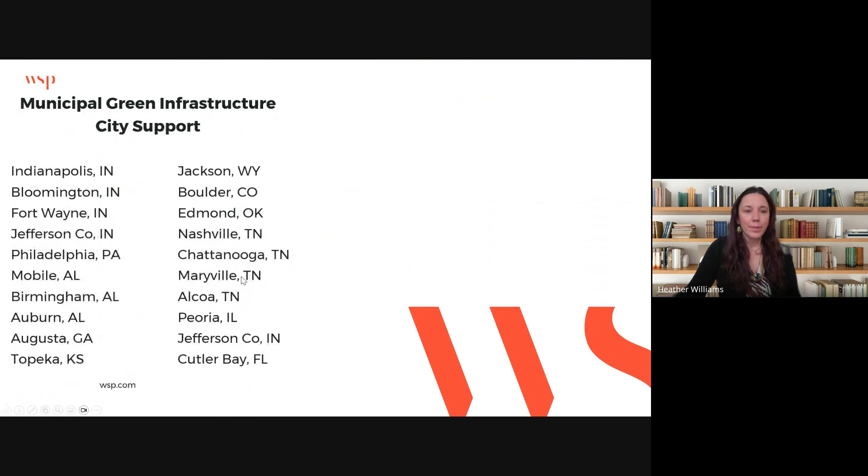So, with that 18 years of experience at WSP, I have had the opportunity to work across the country and also in Canada. I don't think I put my Canadian clients on this slide, but this presentation is really developed from that wealth of client experience across the country. So I have worked in Indiana with several clients, and then also across the country. So you can see I've worked in Colorado, Wyoming, Tennessee,

Pennsylvania. But the reason I'm putting this slide up here is that there is no one size fits all to stormwater management. There is no one size fits all to green infrastructure and sustainability integration. Each of these clients, we've taken a similar approach to process, but getting to the end goal of successful implementation of green infrastructure is unique to each of these clients.

And in this presentation, I'm going to give real life examples. And most of these photographs are pictures that I've taken, projects that I've worked on. And so as I'm speaking, I'm going to give a lot of lessons learned and opportunities for collaboration throughout the presentation.

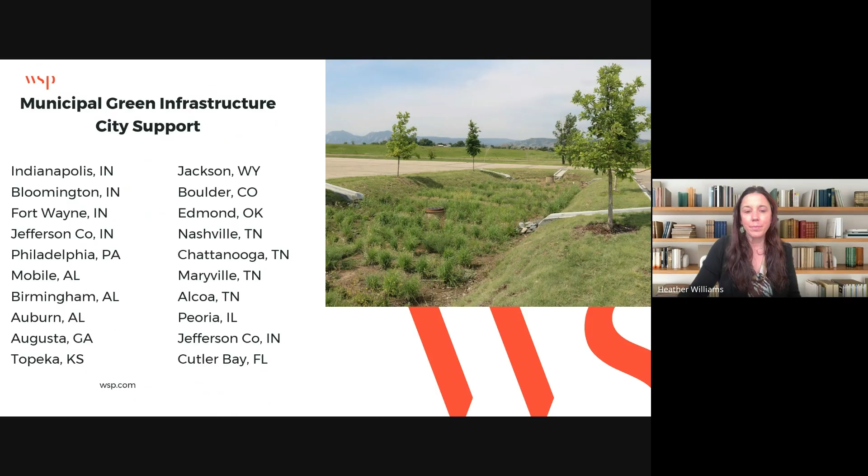So the presentation outline today, I know I have a broad group of participants, of multiple target audiences here. So I'm going to just go through why is stormwater a problem, and then talk about the regulatory history of stormwater. And, you know, being in the stormwater industry, like any industry, we have our acronyms. So I'm going to try to stay away from using tons of acronyms and talking too quickly, because I've caught myself doing that before.

So again, I'm going to start with why is stormwater a problem, and just tee it up very basically, and then go into what is green infrastructure and low impact development, and how does green infrastructure work in municipalities? What are we actually talking about? Are we talking about capital improvement projects? Are we talking about private development and redevelopment? Or are we talking about all of the above? So I'm going to really dive into how does green infrastructure work in municipalities?

You know, what are the different motivators? Some communities I've worked with, it's more of a mayoral initiative where the mayor is really into sustainability and green infrastructure, and there's not really much regulatory pressure. However, in other communities, there's tons of regulatory pressure, maybe coming down through the state saying you shall use green infrastructure. So I'm really going to dive into some of those different motivators for using green infrastructure, because that helps a municipality develop the program.

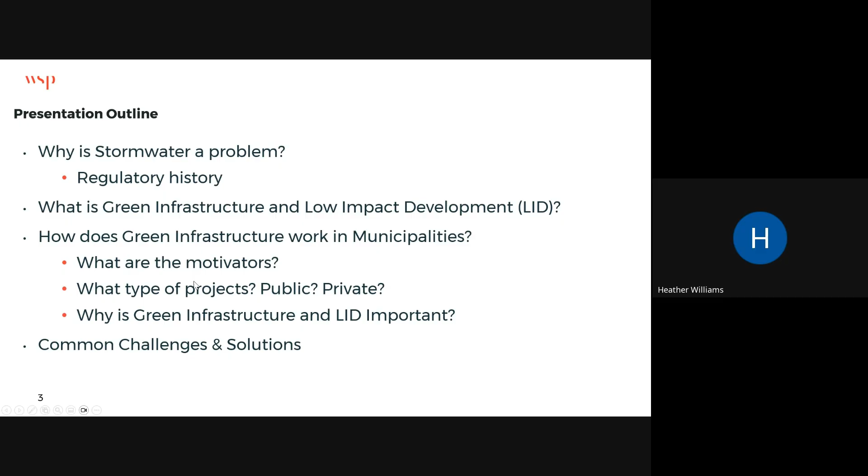So let's get into the why. Why is stormwater a problem? And we're going to start with thinking about water quantity, so the amount of water coming off of the land. If you look at the top image to the left, this is natural ground cover. If we think about natural ground cover, wooded areas, grassy areas, when it rains we're not going to have as much runoff coming off of this natural ground cover.

So you can see there's about 10% runoff coming off of the land as compared to the image on the right, which is 75 to 100% impervious cover. So if you think about developed, downtown areas where there's a lot of impervious surface, 75 to 100% impervious surface, we're going to see about 55% of runoff coming off of that land type.

So the amount of runoff coming off of a land type is really important when we're thinking about stormwater from a quantity perspective. When we have all of this impervious surface on our land types, we're going to get larger volumes of stormwater coming off, and flooding can occur. This right picture is of flooding occurring. And when we have that volume of water moving into our streams, the left picture shows severe stream bank erosion. So that flooding and erosion are tied to water quantity problems.

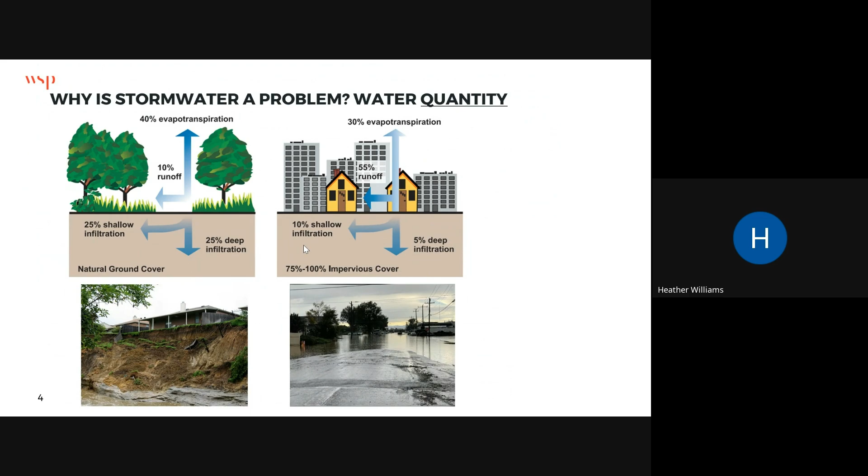And then we also have stormwater quality issues. If we just look at a typical residential lot, you're going to have cars, pets, etc. But the main point of this image is, if you look at the stormwater coming down, it's just running off of the surface, it's going to find a storm inlet, go in the storm inlet, and that storm inlet is connected to a storm drain. So there's no type of filtration happening here.

The stormwater is just moving into the storm drain, and then that's going to find our local waterways. As the stormwater moves over the land surface, it's going to pick up things like pet waste, leaves, fertilizers, motor oil, all of those pollutants associated with basic daily activities. So stormwater quality is an issue because we don't have any treatment happening. The stormwater is just moving into the storm drains connected into the waterways.

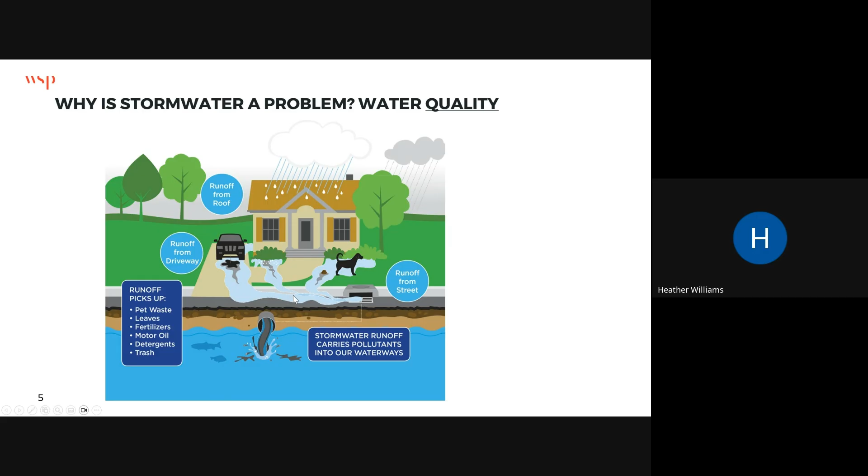So again, just another visual of water quality issues happening in stormwater. As stormwater moves over the land types, it's going to pick up sediment. That sediment's going to connect directly into the streams. We've all seen trash and lawn debris in our stream network in the grate system of stormwater inlets, and nutrients. This picture below in the middle is of nutrients. Nutrients happen from over fertilizing our lawns. Nutrients are phosphorus, different things like that.

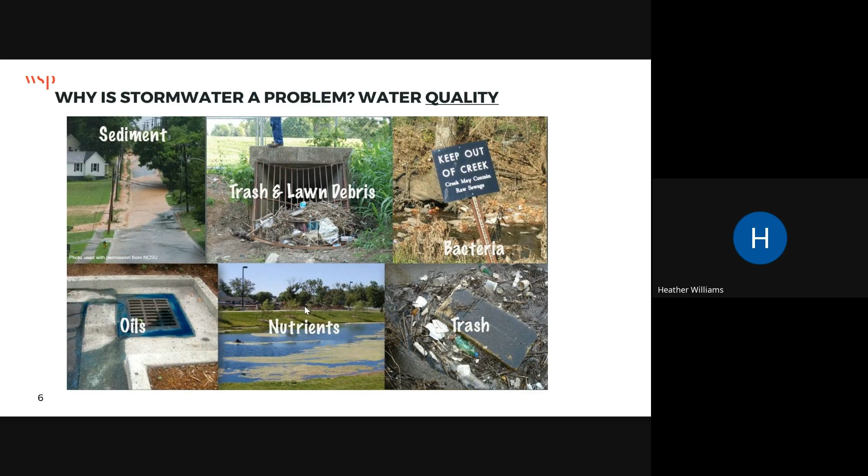So again, I just wanted to provide visuals of why stormwater quality is an issue and what type of pollutants are found in stormwater. So we're thinking about stormwater quantity and quality. And if we think about stormwater quantity and quality, we can then progress to the history of stormwater management strategies.

So, I went to Purdue in the late 90s, early 2000s, and we really learned a lot about this pre-1990 design: get the runoff into the streams as fast and efficiently as possible. When we talk about pre-1990, we're talking about drainage control. We do not want any flooding on our roadways. So I have a picture of typical roadway inlet design. We're designing this for a 10-year storm to get the water off of the roadways.

And then from 1990 to 2008, and these are just rough dates that help categorize the history of stormwater management, you're going to see a lot more detention basins, because regulations were put into place to detain and slow down the rate of discharge of stormwater. So more local flood control strategies here, detention basins. We're seeing detention for larger storm events.

And then really 2008 to 2018, again, I said I wasn't going to use many acronyms, but Phase 2: the Clean Water Act, Environmental Protection Agency, and the state regulatory authorities put into effect some Phase 2 municipal separate storm sewer system requirements. So 2008 to 2018, we're seeing more water quality requirements.

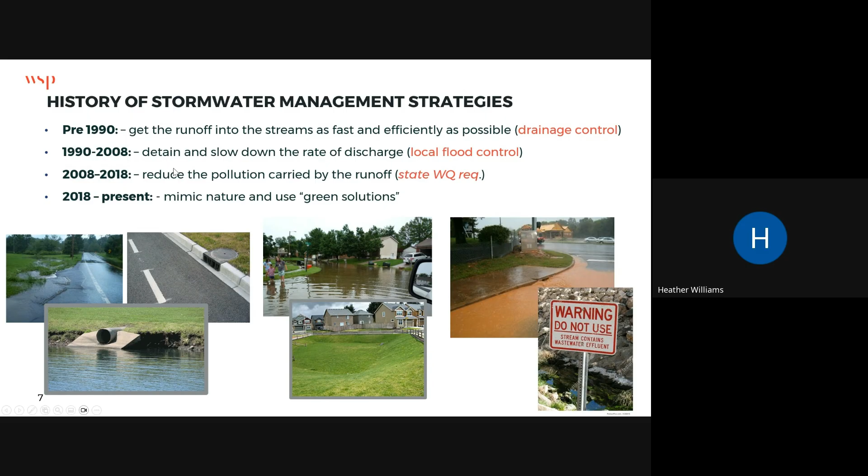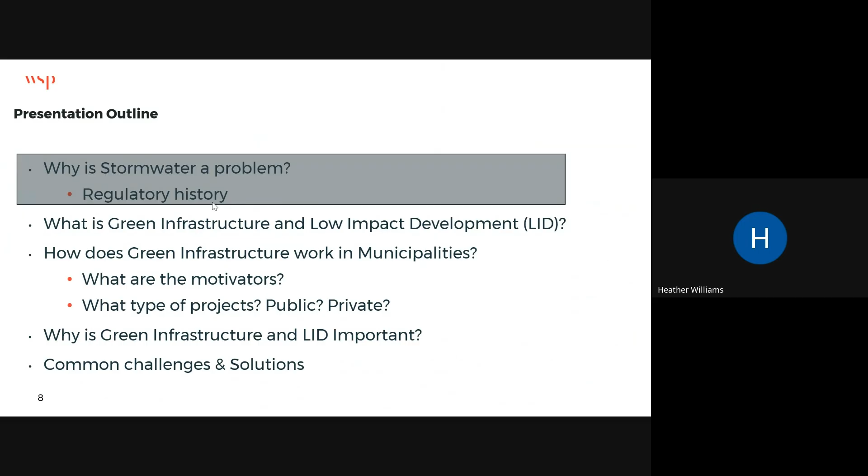So from here, again, we've gone through why is stormwater a problem, and the regulatory history that has resulted from that. So now we're going to jump into what is green infrastructure and low impact development. And I'm going to give you some of those examples of how the water quality volume is traditionally met in the state of Indiana. And then, what we're talking about today is green infrastructure and low impact development, and how we can maybe see more of that in public and private projects.

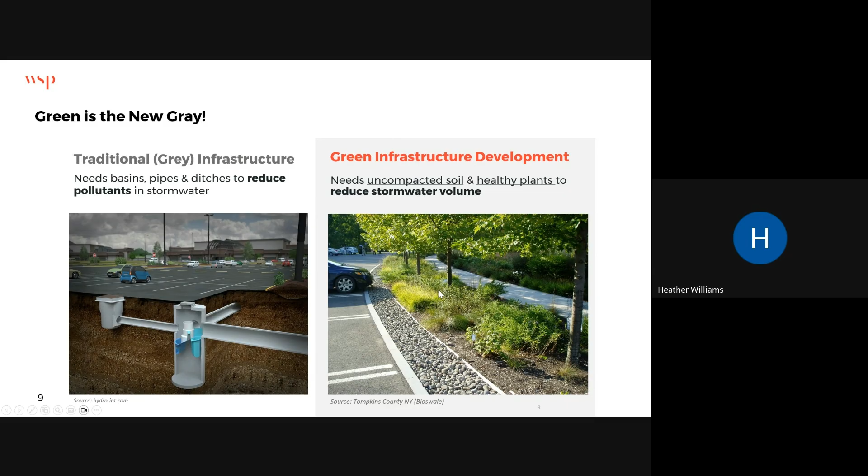So again, you can see the parking lot here on the right-hand side. The stormwater is going to sheet flow through to this gravel area, which is a forebay or sediment basin to help pre-treat the stormwater and the heavy loads of sediment coming in. And then the stormwater is going to flow into the vegetated area. And then the next slide, I have more of a cross section to show you that the green infrastructure system or bioretention area is actually an engineered system to treat a particular volume of stormwater. You can see there's an engineered soil layer here, there's a gravel layer, and then we're always designing these systems with an underdrain system so it takes those larger storm events and doesn't flood out the system.

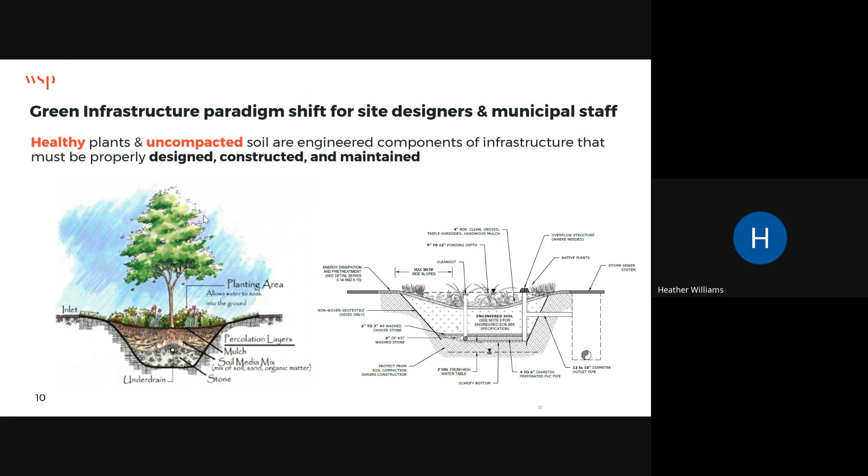So this picture is just to show that although the image before looked just like traditional landscaping in that parking lot, bioretention is actually a designed system with engineering components. So now not only are the inlets and pipes components, the engineered soil and plants are part of our municipal infrastructure. So that infrastructure has to be properly designed, constructed, and maintained. And those three words are words that I use constantly with all of our clients to make sure that we're not just putting something into the ground that's not going to work properly and be maintained in the future.

And those longer root systems help to break the soil up below ground surface to help stormwater infiltrate into the ground. And then they also help the native plants be drought tolerant. So when it doesn't rain, these plants can get down to the water table to sustain themselves during drought times.

So native plants are very important in the design of these vegetated green infrastructure systems because of what's going on below the ground surface. And then also above the ground surface, a lot of the native plants are pollinator habitats, and create visual interest for our communities.

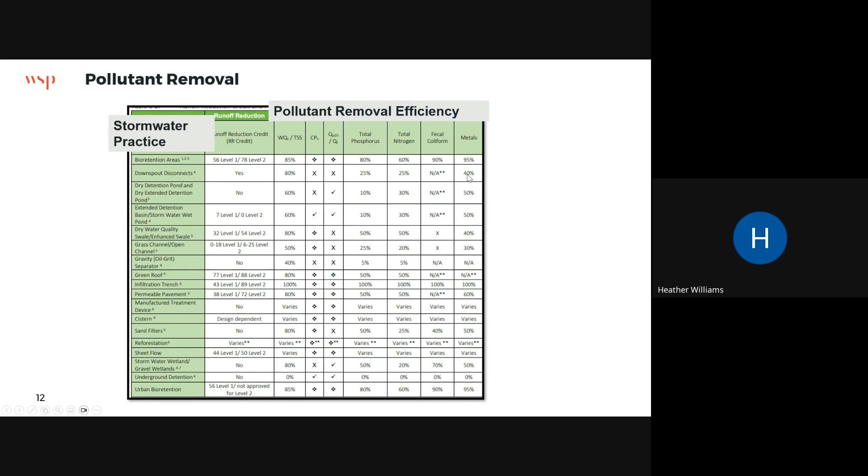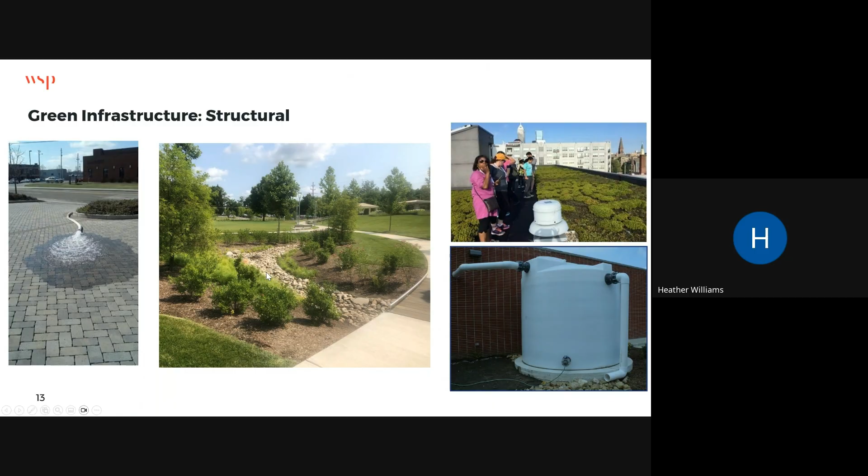So again, this is my language. This is what I speak every day. I know we have different people in the audience, so this might be something new, or I could just be speaking with stuff that you know, but I just want to lay out the terms just so we're all on the same page.

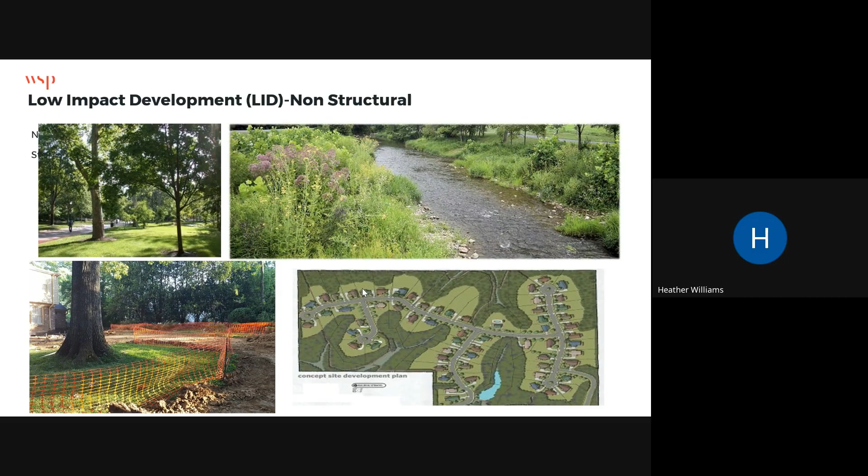So now, I've laid out the regulatory background, what is green infrastructure and low impact development. Now we're moving on to how does green infrastructure work in your municipalities? So from policy, planning, design, construction, long-term maintenance, what are some of those motivators that municipalities have to integrate green infrastructure? And then what type of projects, public, private?

So I'm going to go through some of these items now with some examples of projects that I've worked on, and I'll try to explain those projects and outline those 3 bullets with explaining the projects.

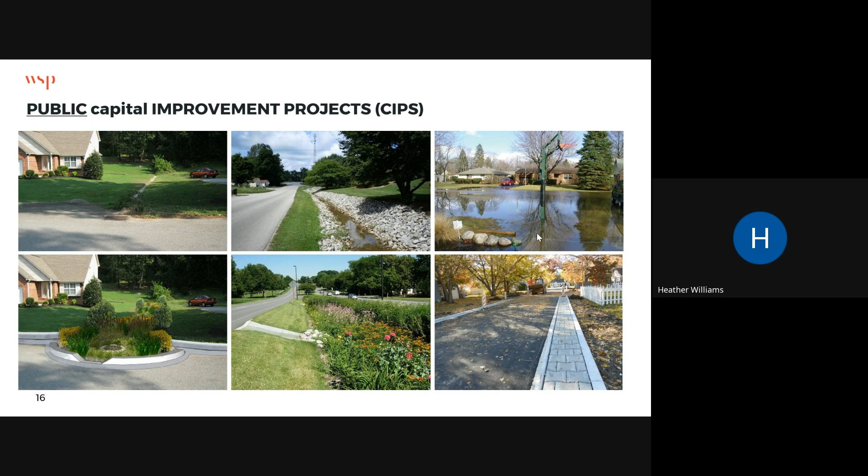But basically we used PaveDrain throughout 8 blocks of this residential neighborhood to treat that first flush of stormwater, the 1 inch, but then this is connected to a larger system. So we're doing 2 things here. We're treating the first flush, the 1 inch of stormwater, but then we're also conveying the stormwater. So it's helping with water quality and flood control here on the right-hand side. So again, these are all capital improvement projects where we've helped different municipalities sort of green up their capital programs.

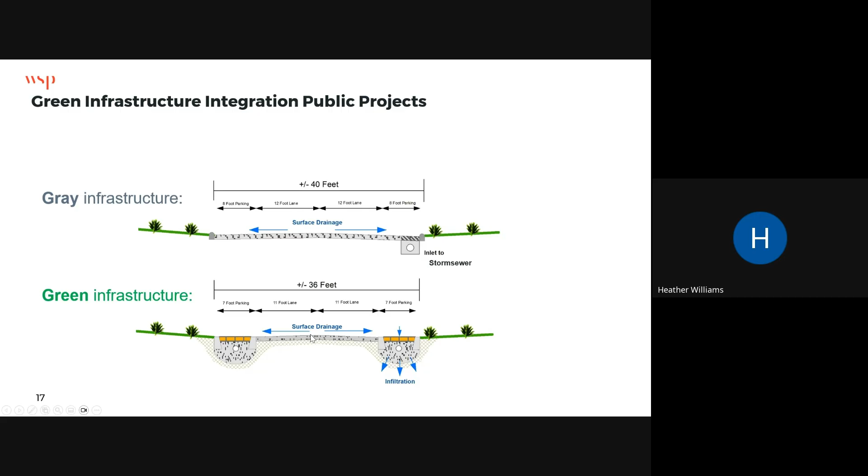And so they hired us to help come up with a solution to manage the volume of stormwater that was being combined into the combined sewer system. And so Peoria is the first community to take an approach to use green infrastructure to help eliminate their combined sewer overflow issues. And so we looked at several miles of roadway in Peoria to put bioretention areas in to manage that volume of stormwater and keep the volume of stormwater out of that combined system. So we had to put together tons of data showing how these systems are working to eliminate those volumes of stormwater going into the systems to eliminate the overflows.

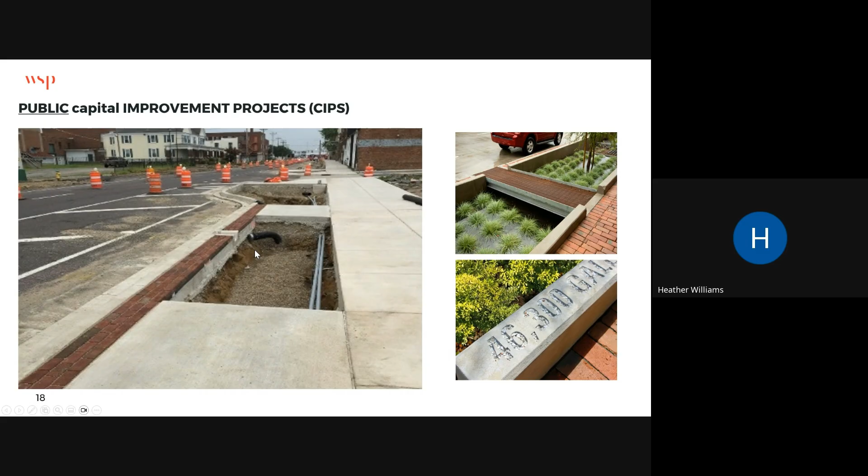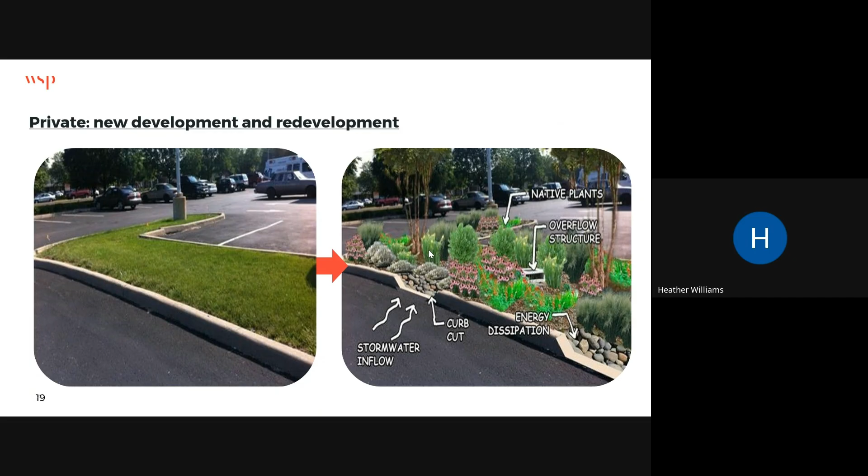How big should the curb cut be? How much inflow can that curb cut take? How do we design this pre-treatment area to make sure that sediment doesn't clog the basin? What type of native plants work for your community? How about the overflow structure? We don't want bioretention to be saturated or to have ponding depth for more than 48 hours. So you have to make sure you design that overflow structure. So there's so much thought that goes into designing bioretention. And again, we've worked with a lot of communities to create educational material and to create engineering guidance.

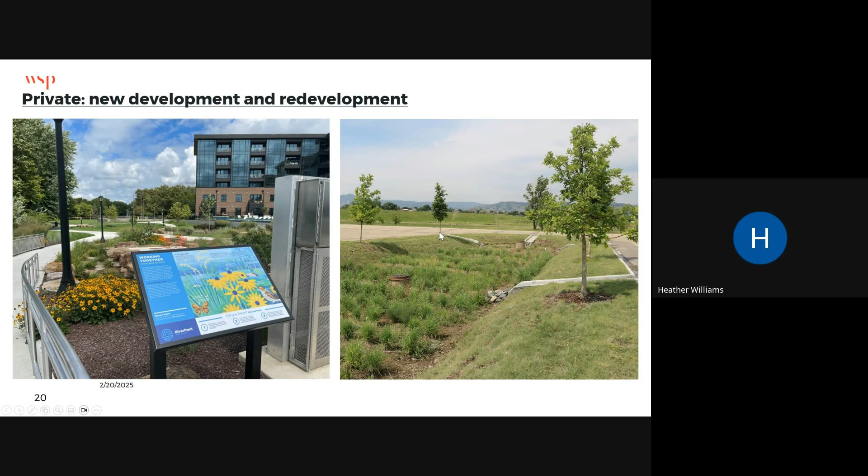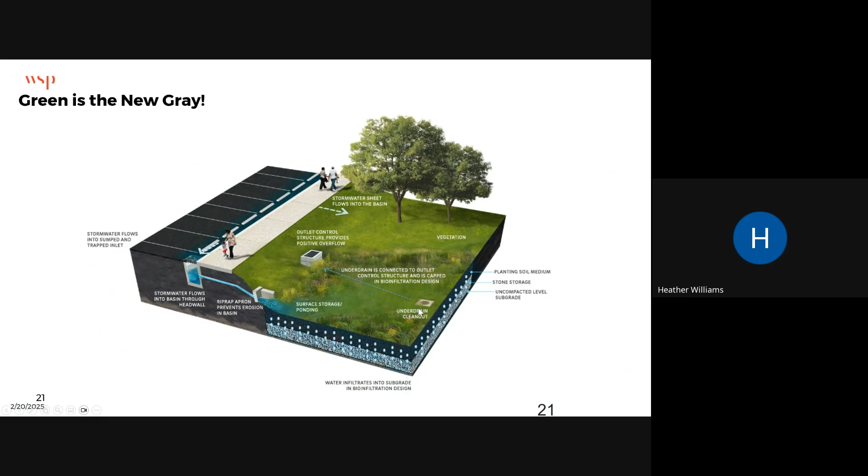Just another image showing you the complexity of the green infrastructure design system. To just an average person walking by, you might just think it's nice landscaping, but there's actually a lot of work being done. And many of these systems aren't purely infiltrating. They're designed to capture that 1 inch of stormwater, but then there's always an outlet structure taking the extra stormwater to the overall storm drain system.

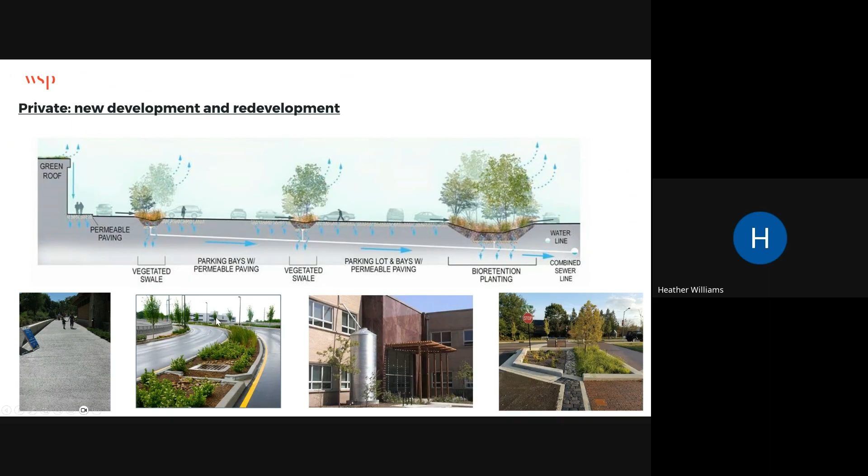So again, a lot of times people are like, hey, green infrastructure can handle larger storm events or it can help with flooding, but it's not going to be your 100-year event safety net here. So that's why a lot of times you're going to have an underdrain system in the design. Again, I've just included some images below just to show you different ideas for integrating green infrastructure into your private or public projects.

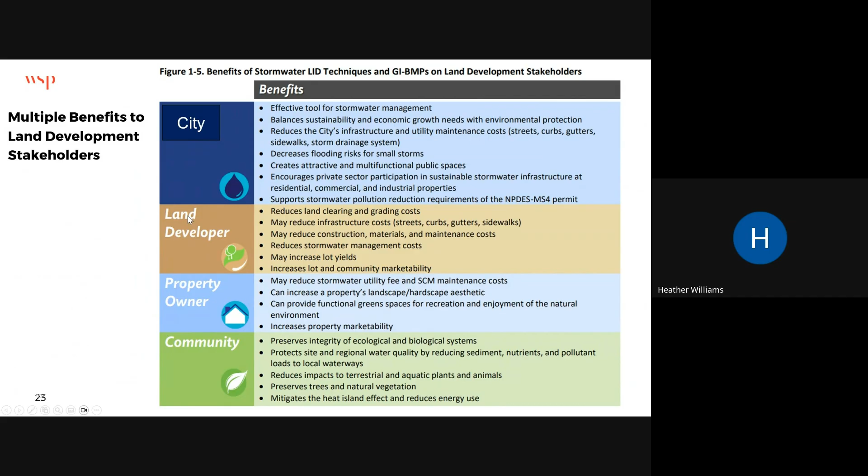For example, when you use green infrastructure and low impact development, the land developer could see reduced land clearing and grading cost. If you're preserving natural areas, those are areas that you're not going to have to grade or clear. It may reduce infrastructure cost, where if you are managing that first inch of rain, you might be able to get smaller pipes, and may reduce construction materials and maintenance costs. So when you think about green infrastructure, think about the multiple benefits to the different land stakeholders that go beyond just that gray pipe, beyond the 80% TSS removal.

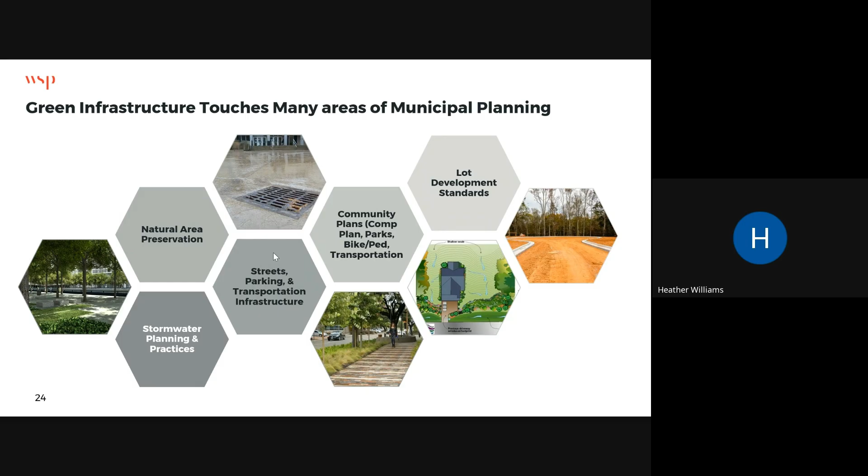And so I just like to show that initial slide because of all the clients that I've worked with at WSP. Currently I'm working with Jackson, Wyoming. You think about Jackson, Wyoming, and the amount of wealth that is in that community, and the lack of regulations is really surprising. But even Jackson, Wyoming is at a point where they contracted us to put together a stormwater program master plan. They don't have a funding source for stormwater. They do not have construction site or post-construction site ordinances.

And so the reason I bring up Jackson is because it's a current client of mine, and we always take our clients through this green infrastructure roadmap planning process. So what are your green infrastructure goals as a community? Why are you doing this? Is it to protect your natural resources? Is it because your state permit requires you to? Is it because the mayor is interested in this stuff? Or it could be all of the above. With all the communities we work with, the goals are always different, but we always want to learn what those goals are.

And then looking at this little yellow tab here and the examples that I provided, it's so important to make sure you have your feasibility criteria set up, your design standards set up, your construction ordinances and policies, and your land development code changes. So once you have your goals, then you look at these types of items to make sure that the green infrastructure is constructed and designed properly. And then what about your maintenance policies? Do we have funding for maintenance?

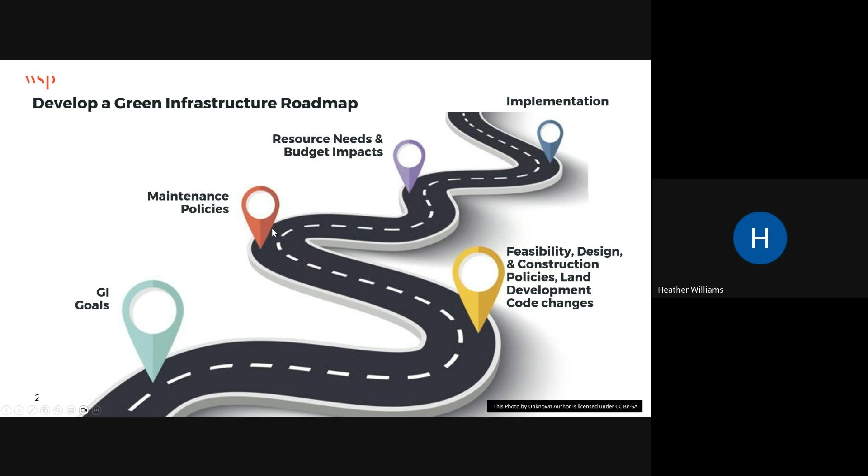And then, conversely, the city of Indianapolis privatizes it. They just contract out all of their green infrastructure maintenance to a firm that understands how to do it. So there are different ways and different policies that you can create. And then, how do all of these things impact your resource needs and your budget? And so then we get on to the implementation. I like this slide because we don't just start designing green infrastructure. We like to take communities through this plan so you can have successful implementation.

And so what is a green infrastructure roadmap? Green infrastructure success requires a balance of stormwater regulation with permit responsibilities for water quality protection, local goals for economic growth, local goals for community water resources, and stakeholder desires for land development flexibility. Currently in Jackson, Wyoming, we're working with an external land development stakeholder group because of their concerns with imposing more regulation in the community. So it's always good to get your stakeholder groups lined up early.

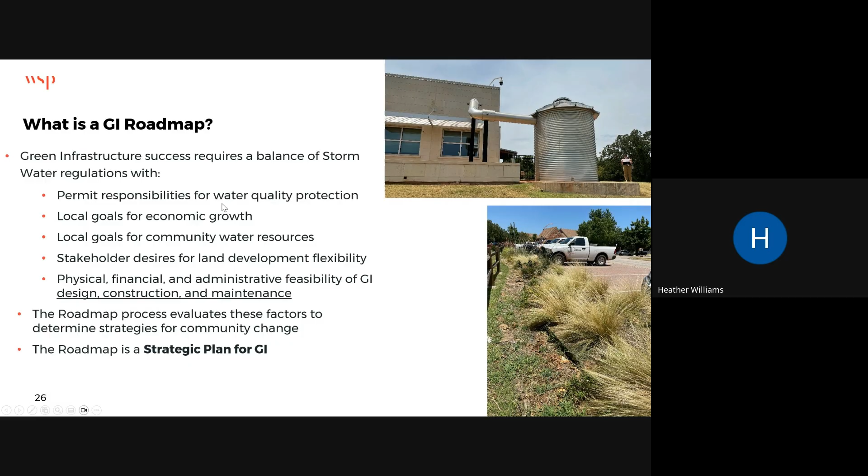And then what about the physical, financial, and administrative feasibility of GI, the design, construction, and maintenance? Infiltration doesn't work everywhere, so we want to make sure we have those feasibility criteria set up. The roadmap process evaluates these factors to determine strategies for community change. Essentially, it's a strategic plan for green infrastructure. So I just wanted to throw these two slides in in case there are some municipal planners in the room, knowing there's a process that we typically take for green infrastructure integration.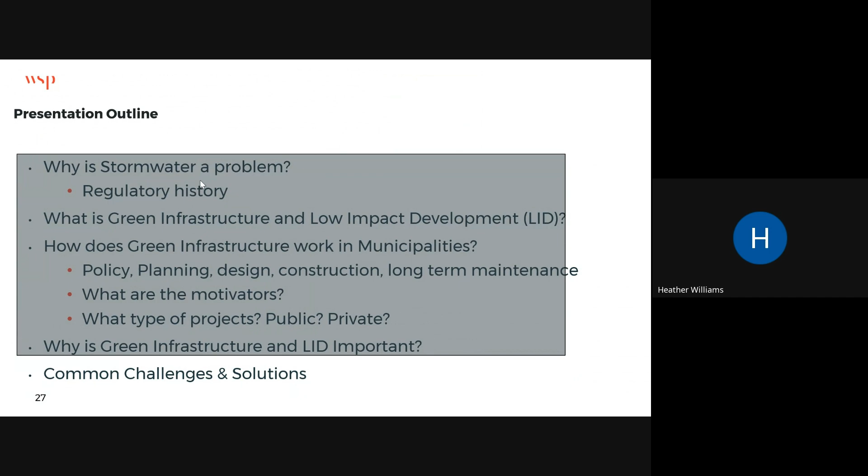So when we're taking municipal clients through green infrastructure, there's always a set of challenges and questions that come up. For example, which green infrastructure practices are right for us?

Should we provide incentives? Where is green infrastructure feasible? What's allowed on residential lots in the public rights of way? Does green infrastructure conflict with city code and ordinances? Should we require or encourage native species? How specific should our plant specifications be? If you do have a stormwater utility, should we provide utility credits?

Who does the construction inspections? Because construction inspection for green infrastructure is different. It's going to take a different set of skills than construction inspection for placing pipe. And so a lot of times, in the examples that I provided before, municipalities have to hire different staff for green infrastructure maintenance and construction inspections.

And then who ultimately is responsible for long-term maintenance? Should that be the private property owner? Should that be the municipality? And that's stuff we help communities think through. What training, equipment, and support tools do we need? So are there vac trucks that we need to help with cleaning out the permeable pavement? These are all questions that we help clients go through.

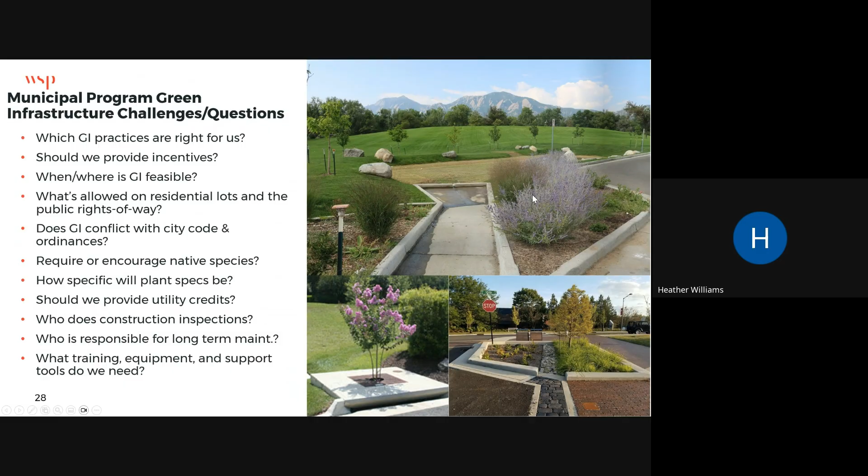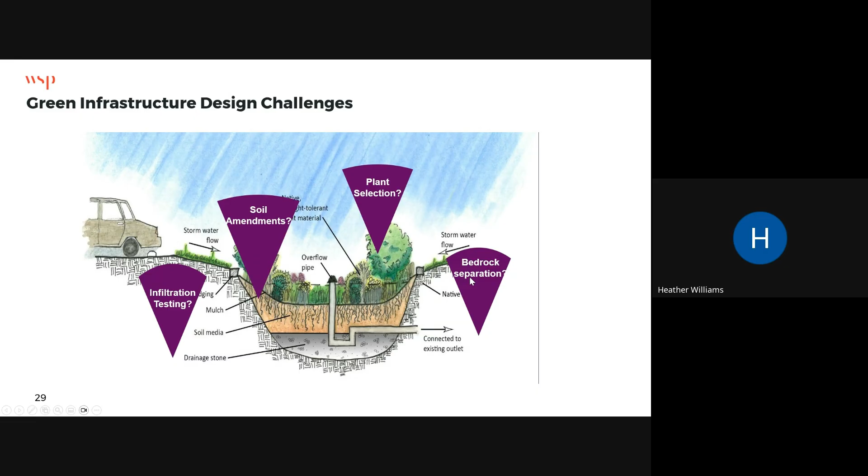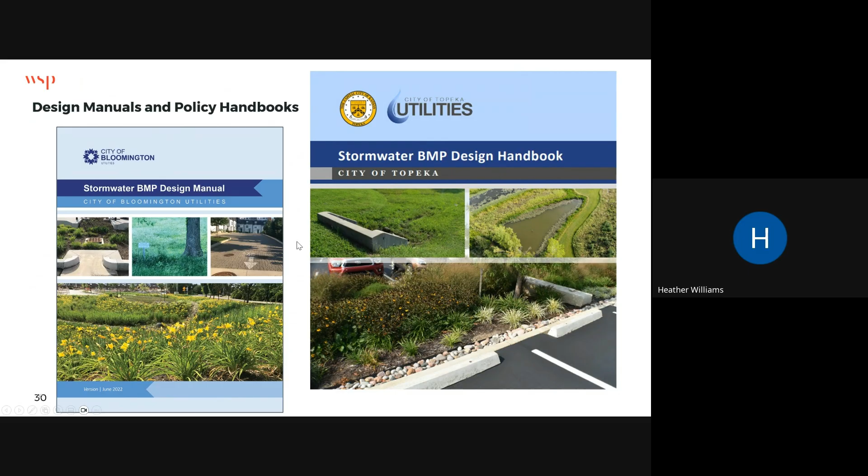Design challenges: we help communities with creating the correct soil amendments for your engineered soil for bioretention, making sure that the plant selection criteria fits your community's needs, what type of infiltration testing is needed if you do allow full infiltration for bioretention, and bedrock separation, making sure that the system is separated from bedrock. So there's different design challenges that come along with bioretention. We create design manuals and policy handbooks for clients to help address some of those issues. I've just provided some examples, City of Topeka and Bloomington.

Another thing that our clients struggle with is green infrastructure in the right-of-way and not having municipal standards or typical details for green infrastructure in the right-of-way. This is the City of Chattanooga and Hamilton County. So this is a Tennessee client that I worked with probably, time flies, I always think about pre-pandemic versus post-pandemic, this was done in like the 2016, 17 timeframe.

But this is an image of just another opportunity here. We did a whole set of green infrastructure right-of-way typical details, but I like providing this one because this is a roundabout. A lot of communities are integrating roundabouts in their transportation design. So how about we have the roundabout function to treat stormwater? So this is a bioretention roundabout. This is one detail of a series of details that we put together for the City of Chattanooga and Hamilton County.

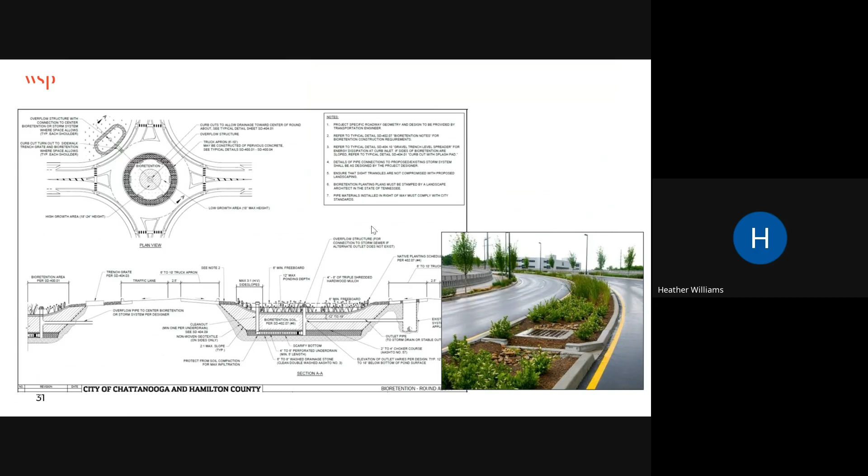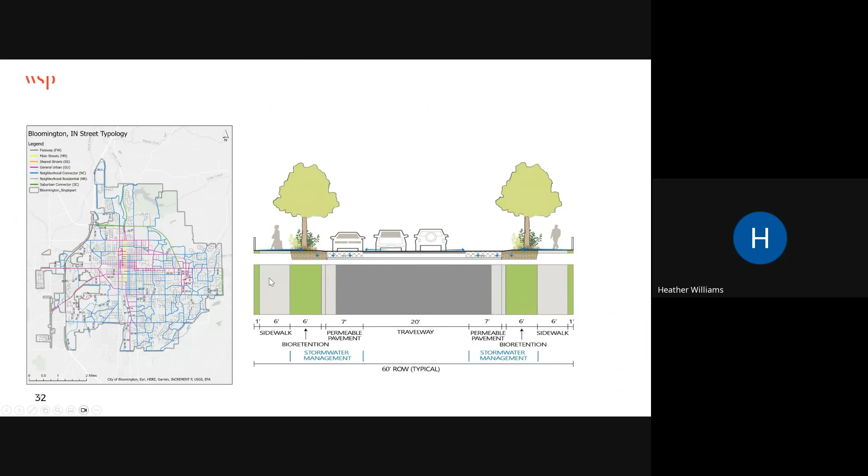This is Bloomington, Indiana. We looked at their transportation plan and did a high-level review of how they can plan for integrating green infrastructure into their transportation plan. You can see this is just using bioretention and permeable pavement. The planning process is just creating really high-level planning images to put into their 20, 30-year long-range transportation planning document. So just doing simple things like this helps start the conversation.

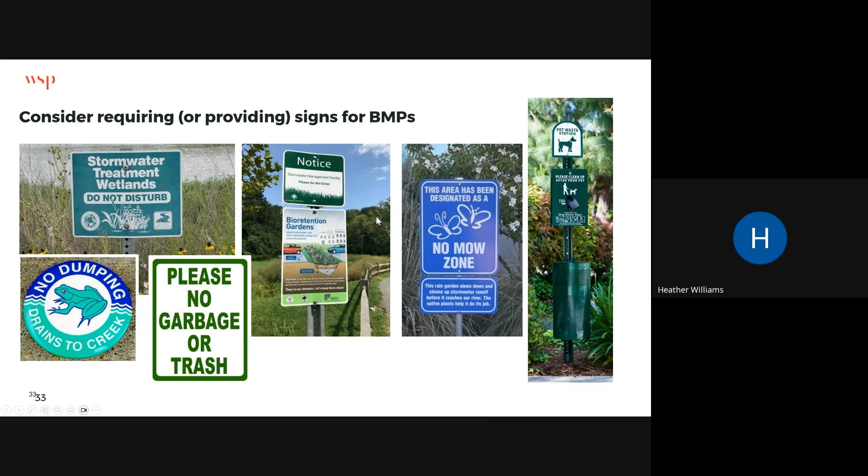And then a lot of the images that I provided, like the City of Fort Wayne, there was signage at the bioretention area. A lot of our clients require private projects have signage to simply say this is a bioretention area, no dumping, no trash, no mowing. So it's just something to think about, how you want to integrate signage into your green infrastructure design requirements.

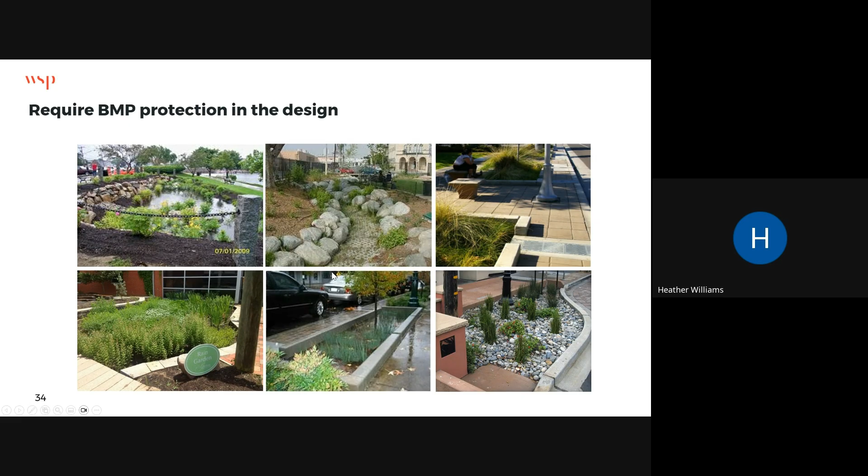And then requiring BMP or green infrastructure protection in the design. Now that I think about this, I do have a picture of a car driving into a bioretention area in Indianapolis, but I didn't include that. But protection is meant to prohibit cars, people, or lawn mowing equipment from going into the bioretention areas. So just thinking about how to create protection requirements in your design manuals.

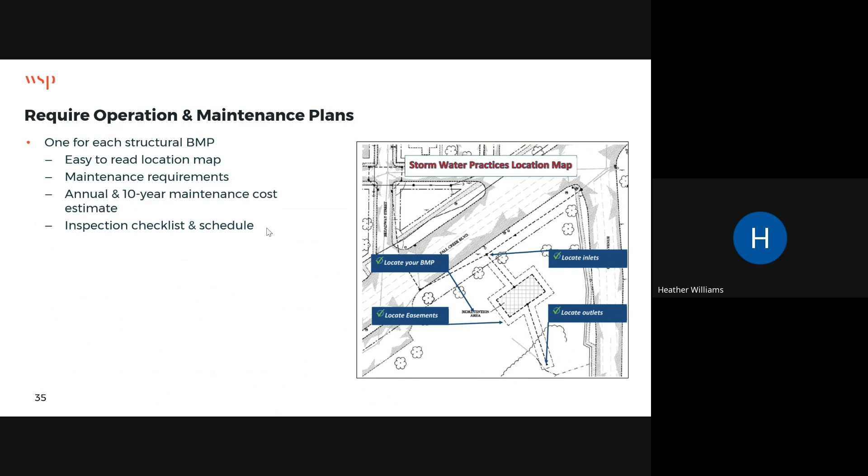And then making sure you outline and require operation and maintenance plans. Your operation and maintenance staff are going to be a lot different than your engineering staff. So we at WSP have started creating really easy to use operation and maintenance standards and guidance material for your landscaping staff and for your private property owner who's not going to know they have a BMP on their property.

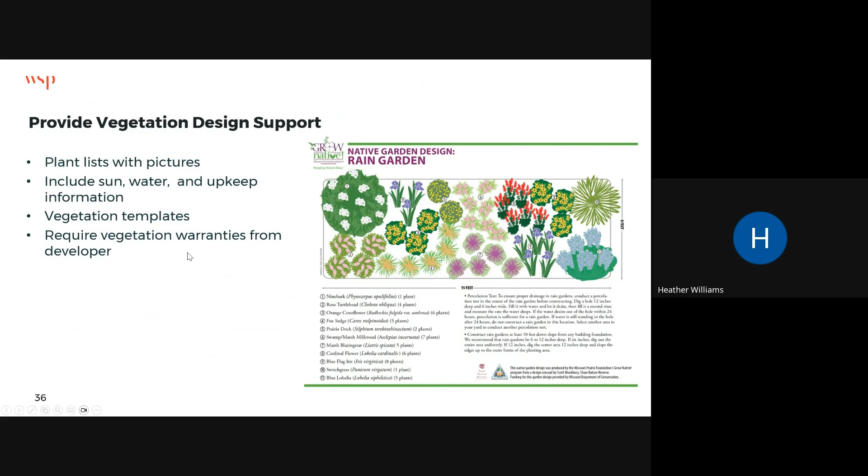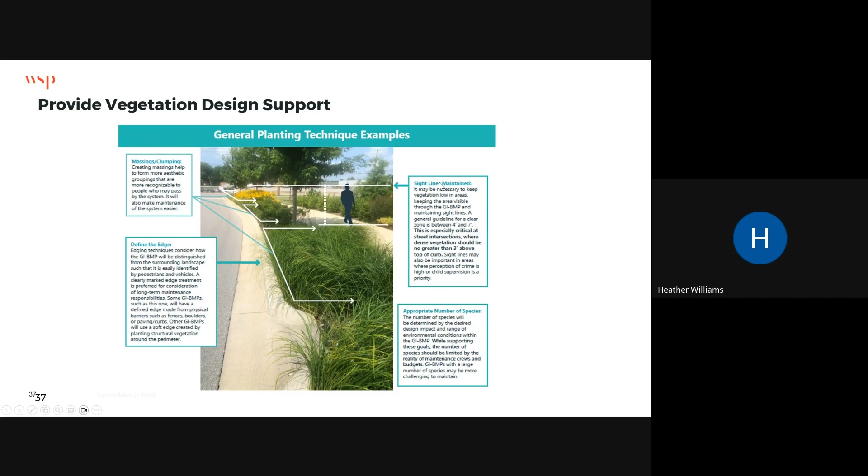And then this is an example of some planting guidance we put together for Bloomington, Indiana, just giving general planting technique examples: mass clumpings, defining the edge, maintaining that sight line, and the appropriate number of species. And again, this is just material out of the guidance that we've put together.

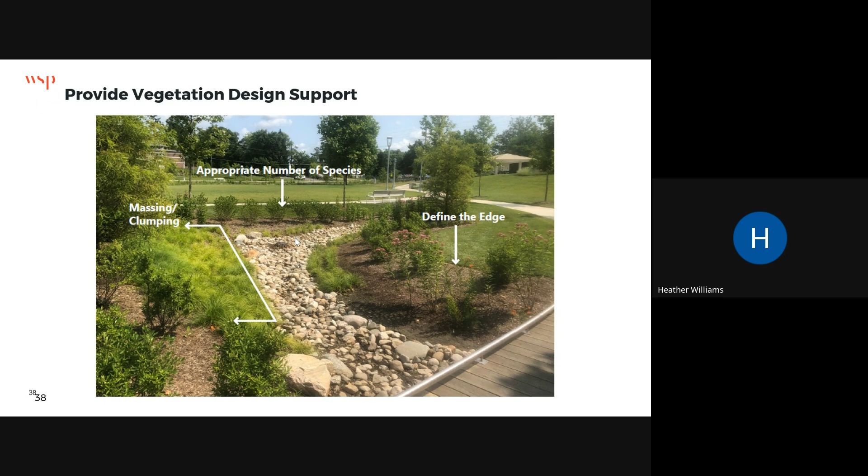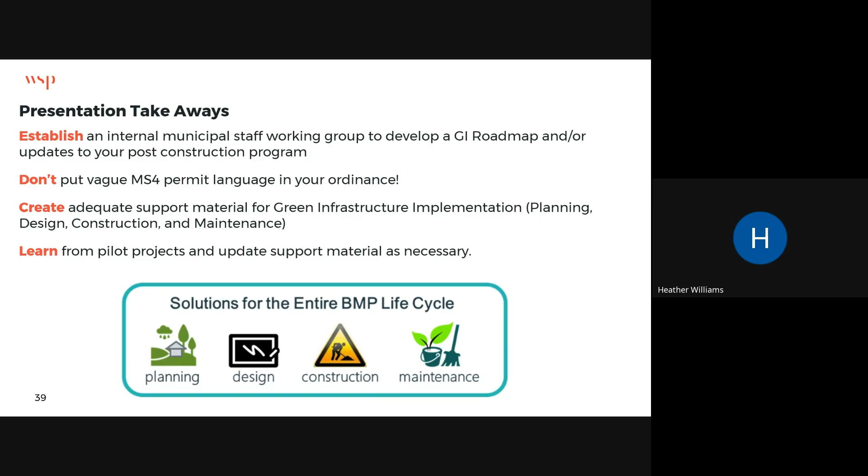Okay, Heather, do you mind if I unpin or pin you on here? No, I don't mind. Yeah. People can see. Oh. See if that works. Okay. Okay, so if anybody has any questions for Heather, I can either ask for you or hand you the mic, but we'll go ahead and take questions now. Okay. One second, Heather. Okay. Find out. Yeah.

Hi, Heather. Can you hear me? I can. Great. Well, let me just start off by saying I'm really impressed with the work that you and your firm have done. It shows a very high level of sophistication in this field. My question is, do you have cost analysis?

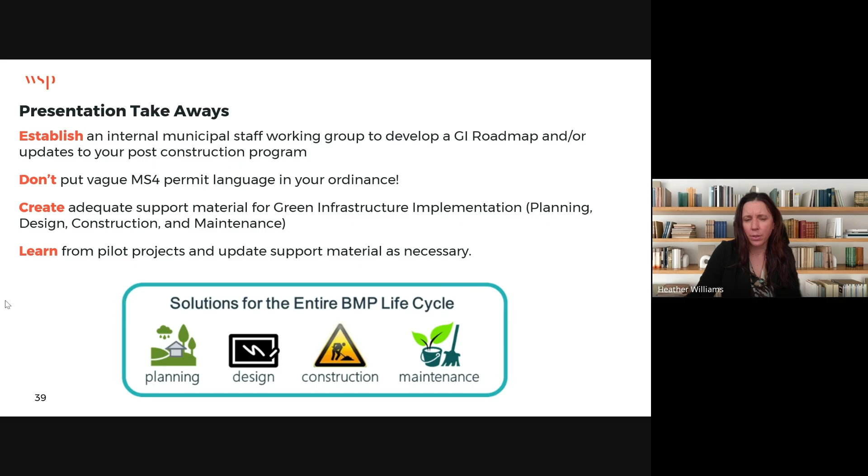Oh, you're welcome. I was going to stay on and watch Aaron's, if that's okay. Or does he have it? Can I watch it, or should I get off? I have it on PDF, so I can throw it on the screen. Would you like? Yeah, we'll probably take five.